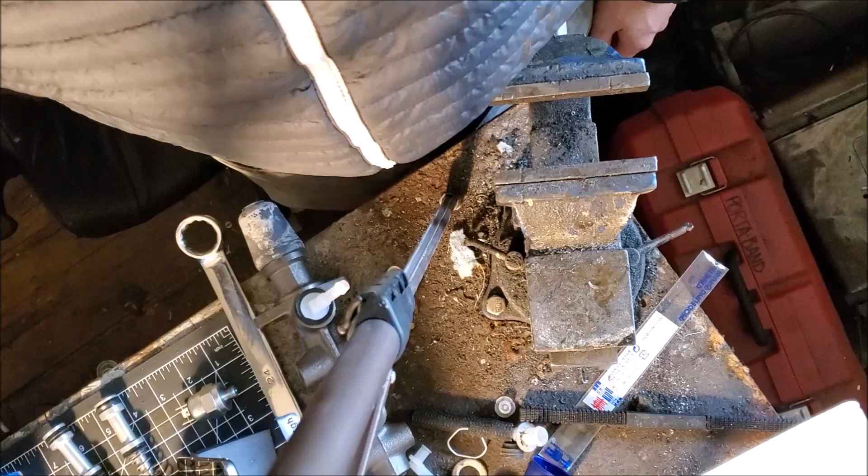Hello. This video is about master cylinders for the Type 3. I'm replacing mine because when I was getting an alignment done, the guy who was doing the alignment was saying, like, hey man, your master cylinder's leaking. It's just a little drip, drip, drip sort of situation. So you should probably look into replacing that.

And to be honest with you, this is the last part of the whole brake system of the car that I haven't replaced. I mean, I've rebuilt the calipers and done all the pads. Not new lines. Don't have to change the lines. The lines are fine so far. Brake cylinders, brake shoe rebuilds for the rear, all that jazz.

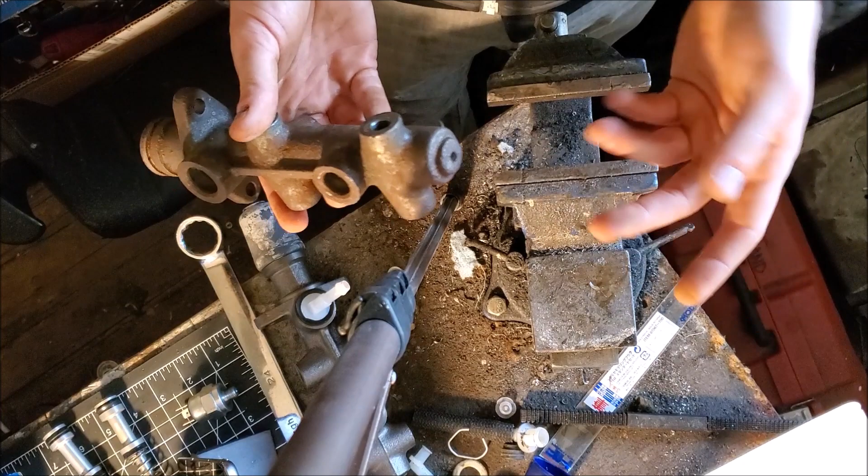This is the last bit that could possibly fail on the car. And it did fail because it's old. I mean, look at it. This is how they're supposed to look. Like, yeah, one's nicer than the other one. So I've been on a bit of an odyssey here, and in the process I've learned quite a bit, which I'm going to share with you guys in case you don't know them.

So basically, the Type 3 masters are essentially the same across years. I think the split is 69, where you had to have a specific line for it. So I think the 69 ones are specific. And the differences, other than the 69, are the internal bore sizes past that, and the internal bore sizes previous to that. And they're all denoted by, like, there's 19, I think there's 18 and 17. Basically, if you take it off the car and it has 19 on it, make sure that the one that you replace is 19 as well.

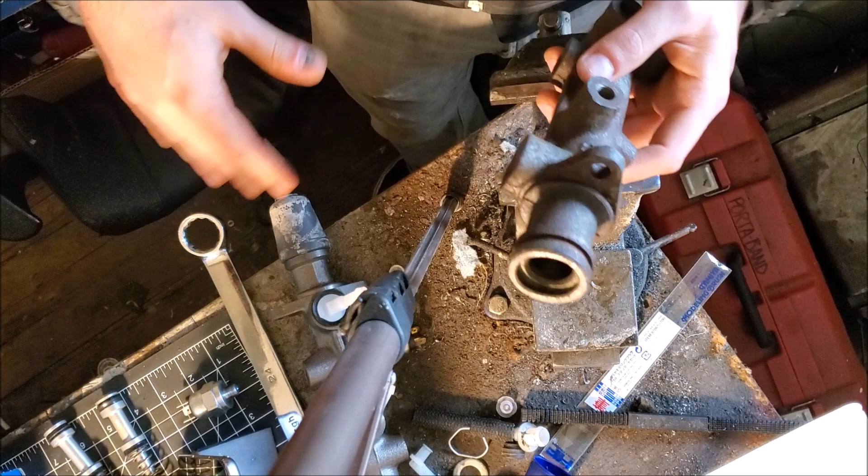But yeah, this one is replaced because I noticed that there's a hairline crack right here, and I actually noticed that today. I was just gonna rebuild the internals, get new everything on it, new rubbers, new brake lines, all that stuff, and then just throw it back on the car. But then I noticed this little hairline crack, and that is definitely good enough to cause a leak. And it's gonna grow over time, and it's best to just replace the damn thing.

These things are not cheap. If you go German, which you should because it's a part of your brake system, and that's not a system that you want to be cheaping out on, ATE, I believe, is the manufacturer. They're like $150 a pop. And I was stupid, and I actually ruined one. This is the first one I got, and I ruined it because of what I'm going to go over later with the brake light switches. I definitely learned my lesson there, so I'm going to share that with you guys.

But let's talk about rebuilding and what it actually all looks like underneath there, if you are going to rebuild it. Rebuilding is always the cheapest way to go, obviously, because a rebuild kit is like $20 versus like 160-ish for a full one of these. So if your actual housing is still in good shape, you should probably rebuild it. It's really not that complicated. If you've ever rebuilt a brake master cylinder on a motorcycle, it's the same thing pretty much.

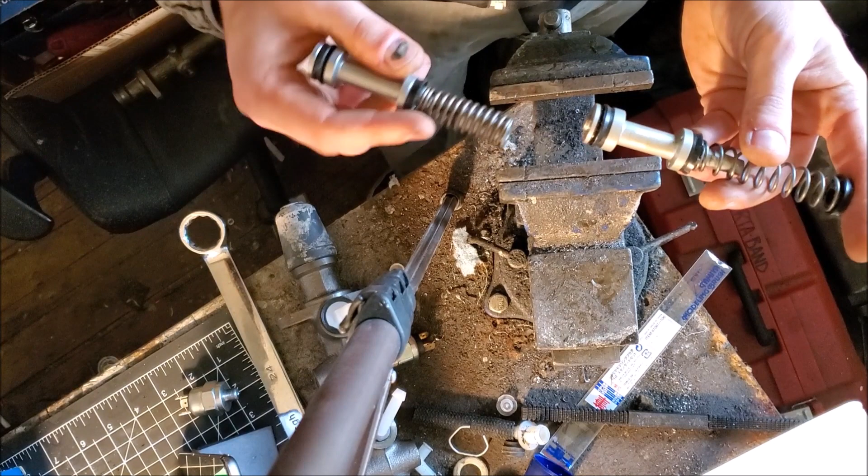Let me just show you how it all sort of looks, the internal pistons and whatnot. So from the mouth, it basically looks like this. This is the back of it, this is the front, the mouth of it that goes into the car, into your brake pedal. So back, front, and this is pretty much how it all fits together. There's two pieces, this pusher and this pusher here. And it's important to look at it to see a few things.

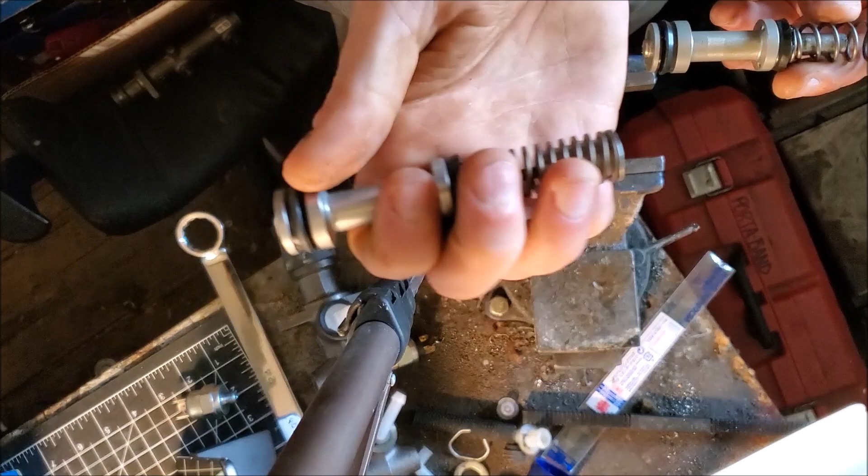All of these gaskets are flared, and you've got to make sure they're all flared in the right direction. You don't want to have it like this or like that, because then it just won't push anything. But it's really easy. Just slide this part in, and then slide this part in, and that's pretty much it. It'll seal itself in.

One part that is a little hard if you're rebuilding is this little cap that goes on the back of your spring here. If you disassemble it, I haven't found a better way than just getting the master cylinder and pounding it, because the front part here will come out no problem. When you take this off and take the circlip out, it'll basically just spring out, and you just grab it and pull it out, no problem.

But this one sits down in here and doesn't want to move. So what you have to do, and hopefully if it's a worn out one it won't take too much effort, is take the mouth against a piece of wood, something soft, and just pound it until it slides itself out. And that's pretty much it as far as a rebuild goes.

But a lot of times this little bit at the bottom here is left behind, and if it's left behind you really can't get at it, because it's not sealed on here any certain way. It just lays on top there. So when you're pounding this out, this thing's not going to come with it, so it's probably still down in there. If you're rebuilding it and this doesn't come with it, just take it off and push it in there, hoping that the last person that rebuilt it put this thing in there.

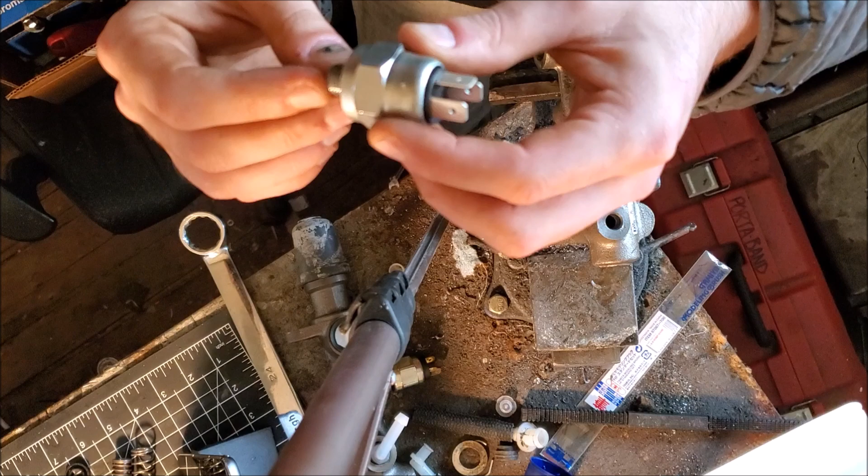These brake light switches are interesting things, because usually brake light switches on modern cars are electronically controlled. This is hydraulically controlled. There's a little pusher in here, so when you push on the brake and send the brake fluid out everywhere in the system to clamp everything down, it pushes a little ball, I think it's a ball bearing, forward and activates the switch here, which tells the brake lights to light up.

So there's a little thing here, fluid goes through there. It's another part of this whole equation where potentially you can have a leak. So it's important to be good about these sort of things. What do I mean by that? Just make sure that's done right.

These are German brake light switches. They're unfortunately about 15 to 20 bucks a pop, and you need two of them. But if you have to replace these things, you have to re-bleed your entire system. So if you have your master cylinder off, it behooves you to spend the extra money. Instead of the 10 bucks at AutoZone, spend the 20 bucks from an actual supplier and get the right stuff so you don't have to touch this for another 60 to 100,000 miles.

If anyone's actually driving their Squareback that much anymore. But I think it's the same idea for the Beetle too.

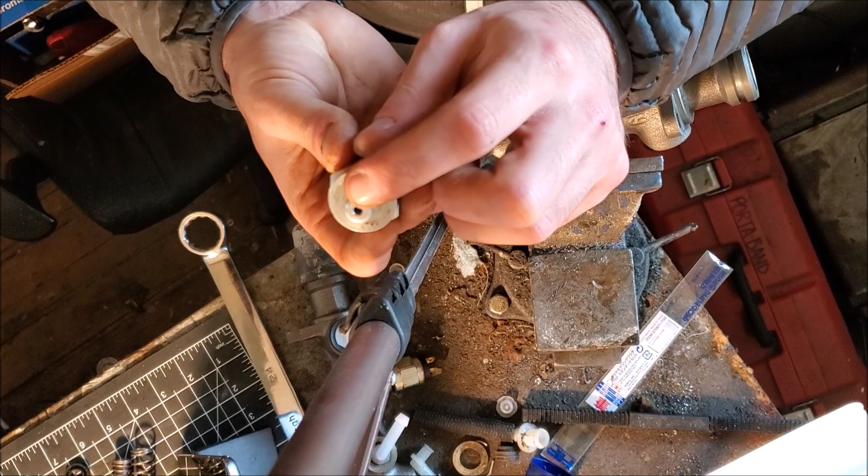So what that means is that you cannot crank this down, otherwise you are going to just shear this entire thing off, and you're going to have basically this stuck in here. And ask me how I know, because I did that. And that's the reason why I had to replace this master,

because one other thing that I messed up with, and this is something that I knew I should have done, but I was rushing, and now it cost me money. I had an extraction tool in there, and I was trying to get it out. So you drill in here and then pound the extraction tool in there and try and torque it off. It was working, but I didn't set my depth well enough. What I should have done is taken my drill bit.

Oh shit, watch it guys.

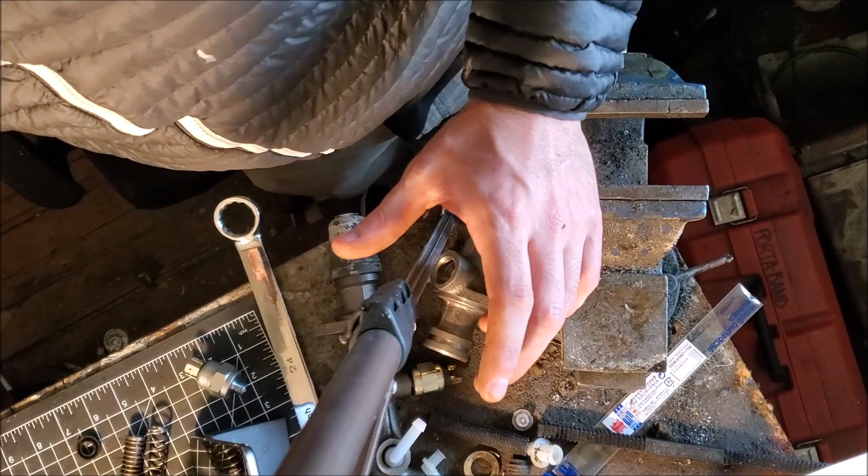Took my drill bit and, as an example, checked the depth on this one, and basically put a piece of tape right there and been like, okay, that's bottom depth, don't go beyond that. And I knew I should have done that, but I didn't because I was rushing, and I was upset that it got sheared off in the first place. So instead of backing off and doing something else, I was like, ugh, screw this, and just kept going. It was stupid.

So I drilled through that into the actual bore here, and I don't know if I ruined it, but definitely it's not perfect anymore. So I decided I had to go and get another one. So learn from my mistake, please, because this stuff's expensive. And I had to pay for my mistake. Hopefully you won't have to.

So, one more quick thing to go over before I show you the right way to put these brake light switches in. Come on, buddy. Damn, these things are on there. Okay, so the brake lines, this hose bit right here. When I took this off, initially what I thought was causing the leak was these hoses that connect the hard lines to the master cylinder, there's a little bit of hose here.

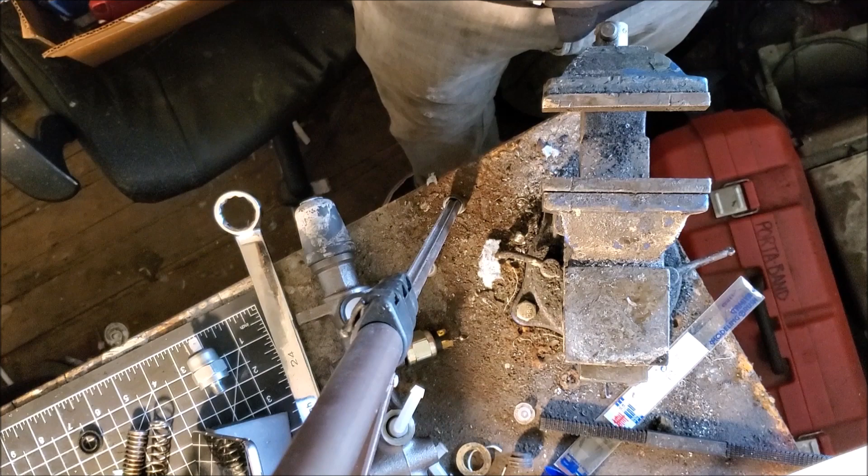And this stuff is really tight because now I can't fucking get it off. So good thing I got a couple feet of this stuff, because I think I might have to just throw this out because I can't get it off again. So yeah, this is the stuff. That's what you want. It's not that expensive. It's just, you know, you have to wait for it. So I would replace that stuff if you notice that the stuff on there is not the actual right line, and it's like fuel line or something.

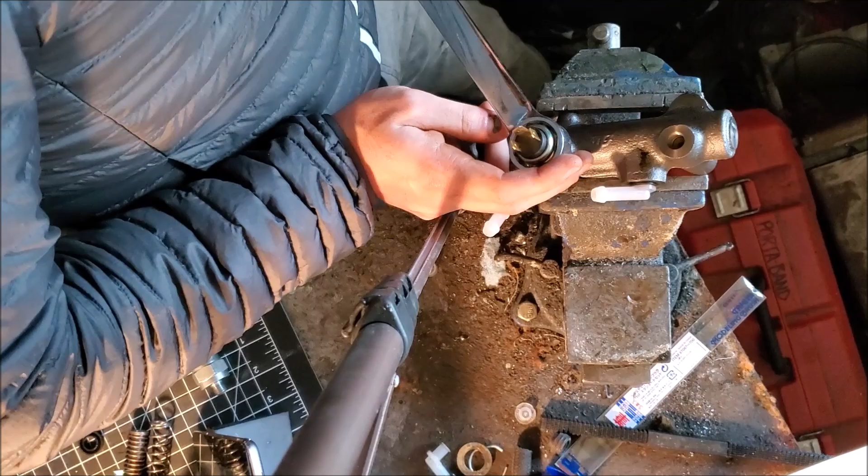So anyways, let's talk brake switches. So when you're putting these things on, and by the way, this is a 24 if anyone cares, you'll notice that it gets to a point and then it's just really tough to get these guys going down. And again, because of the makeup of these things, you don't really want to force them. So the best thing to do is what I'm doing right here. Let's just back it off, tighten it. Whoa, shit. Ow. Just do that little dance for a while, and eventually it'll close itself up.

Maybe it would be easier if, like, put a little brake fluid in there or something. I don't know. I don't think it would be that much easier, but the fact of the matter is that you get to around here and then it stops going, and you have to be careful with this stuff again because it's not very strong. So I'm gonna do that back and forth, back and forth, and get these brake switches on here, and then I'll go under the car, put it on there, and hopefully show you how to reset your brake pedal and all that stuff.

Another thing to keep in mind is when you have this boot on here, there's a hole. The hole goes on the bottom, not the top. It goes on the bottom. Pro tip. But anyways, that's enough bench work. Start actually putting this on the car.

And by the way, being that the Squareback is pretty much done, my next project, I'm going to actually start working on my Subaru again. So videos of that to come, and then immense amounts of hate because the Subaru community is pretty bro-y and they all know absolutely everything. So looking forward to dealing with those guys. You Volkswagen people are just the fucking best people on earth. I love you guys. But yeah, looking forward to that one for sure.

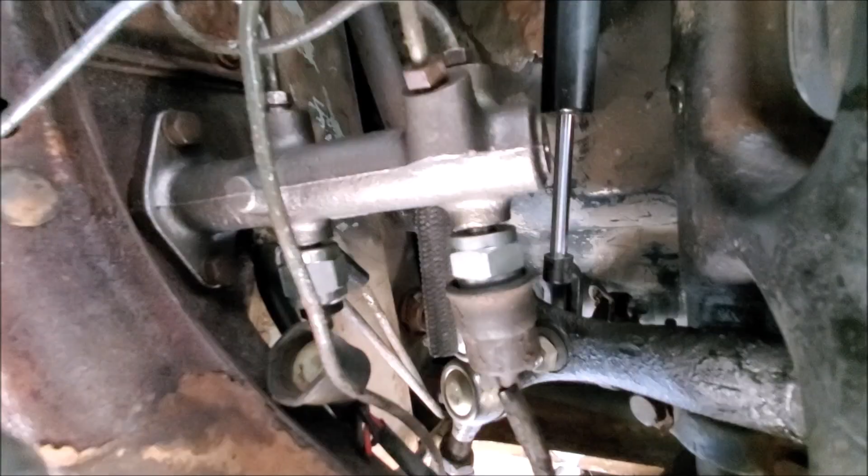And we're under the car, and the master cylinder is pretty much installed. I'll tell you what, man, this wide angle lens, super cool for getting underneath here. So anyways, 13, 13, 11, 11, 11. This is the part of the job that sucks because you have like no room to do anything in here. Everything's just crescent wrenches, and you're here for a while, and your wrists and your forearms end up hurting. But you end up daydreaming about that next purchase, the next thing you're gonna do. You just sit back, relax, and you're gonna be under here for a while.

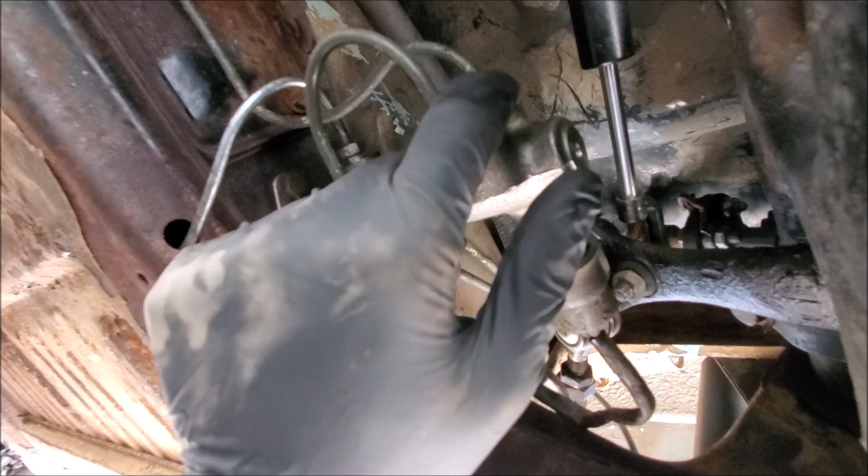So yeah, everything just gets snugged up. Don't go crazy because it's little threads that we're dealing with here, and you don't want to round these off. Snug it up. Same with these. Snug them up. Put your guys on there. Connect your hoses to the brake lines, and that's it. And then from here you bleed and hope that nothing leaks out while you're doing that. And the bleeding procedure is furthest away to closest to the master cylinder. So you're going to start with the passenger side rear wheel, driver side rear wheel, passenger front, driver front, and that's your bleeding. You know how to bleed. Get it done. This is the job.

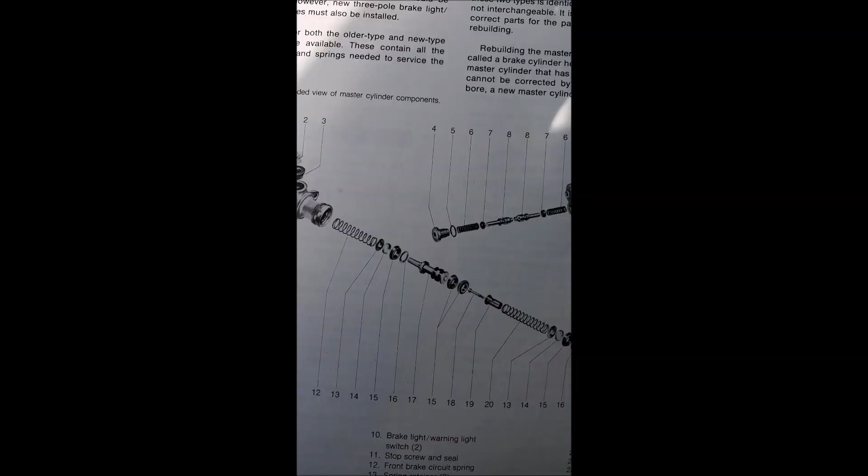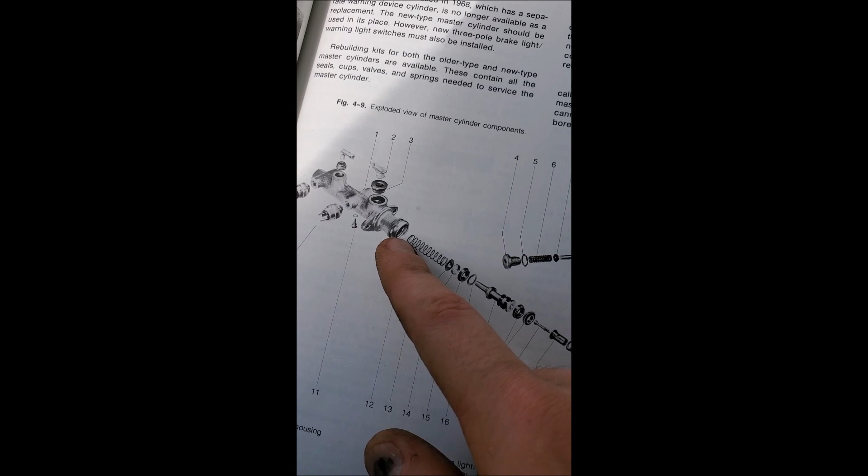Enjoy your life. Okay, I messed something up. I'm looking at the exploded diagram of the master cylinder. There's nothing that goes below that spring. That little stopper I was talking about that I thought went on the bottom actually goes right there. Or actually, no, it's right there.

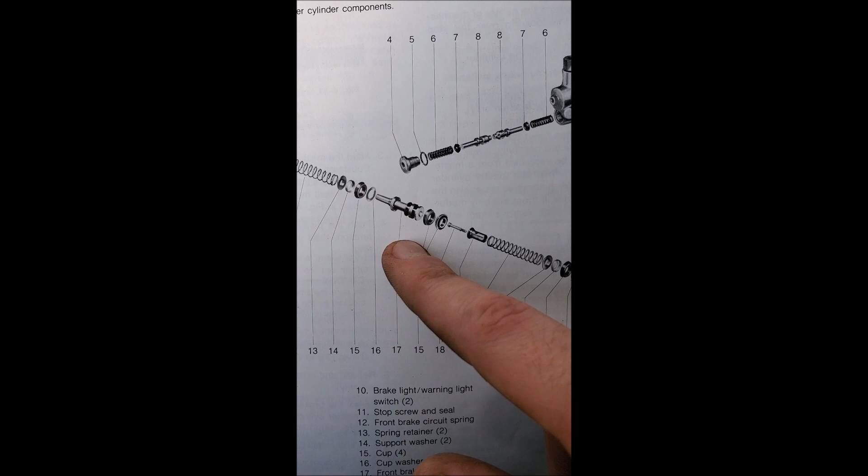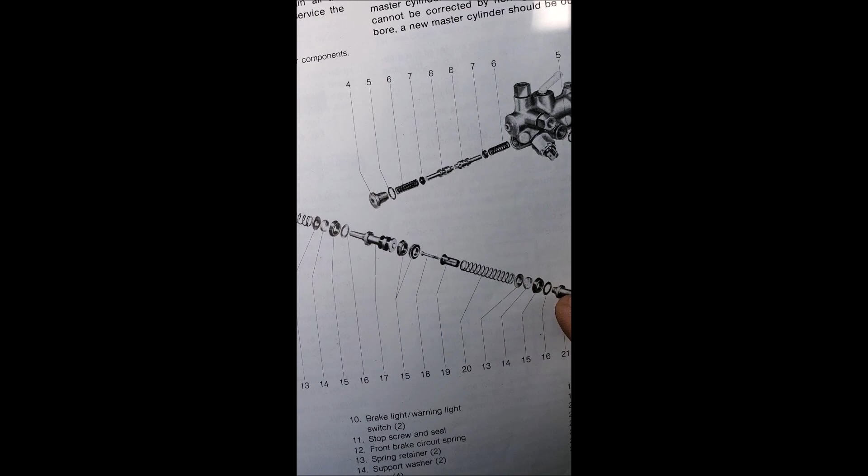So yeah, it goes in between the two here. Nothing goes back there. But yeah, this is why a shop manual is such a good idea. Anyways, next thing we gotta do, push rod adjustment.

This has turned into one of those jobs, man. You know what I was talking about not doing? Over tightening this. And look what I did. Sheared it right off. So now you guys get to see, well, one of my favorite videos to watch on YouTube is videos of guys doing bolt extractions. But the thing is that they're fun to watch, not fun to do. But this time I'm not going to screw it up. I'm going to get this right.

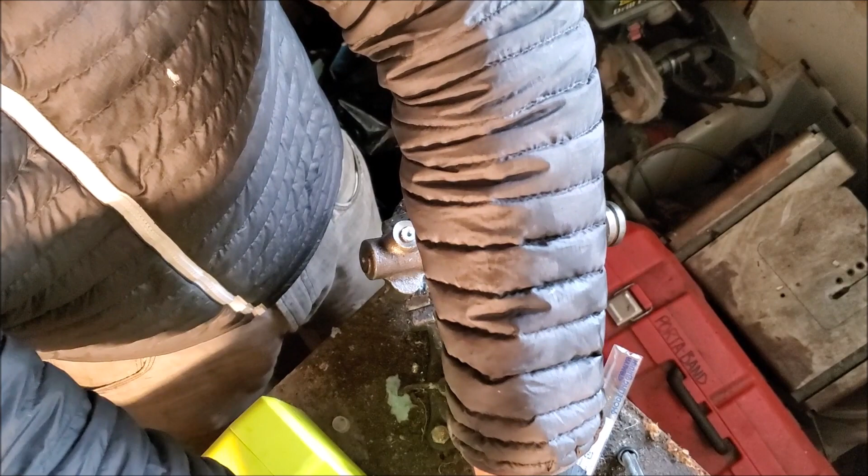So, what am I going to use? Well, some, what do you call those things that you use to drill things out? Drill bits. And then these to get it out. So first thing I gotta do is drill this, but I need to remember how I was saying about that depth gauge. I gotta make sure that I don't do that.

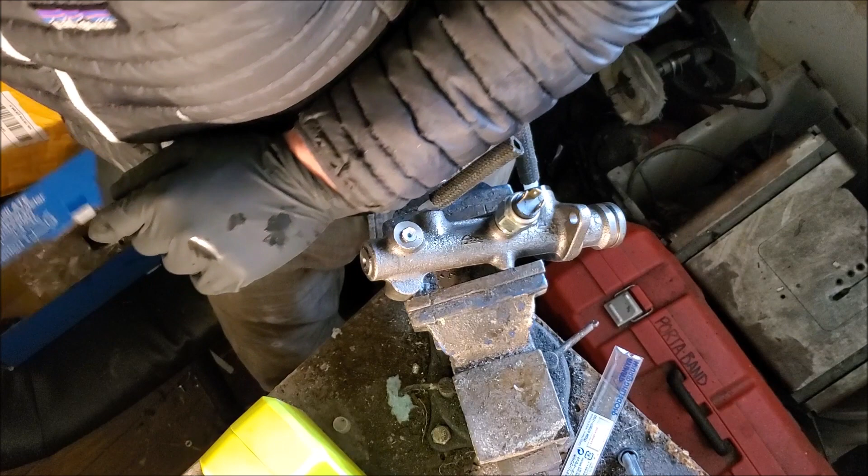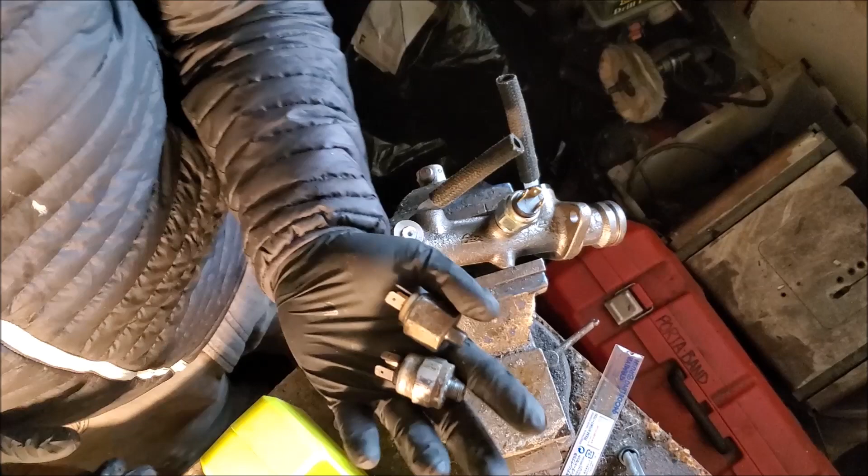So I think I have some older brake switches lying around. I think I'm gonna use that to measure. So give me a second. I gotta find them. Found them. These guys. These are actually the original ones that came off the car. But they're not OE. This one might be.

This one isn't. The weird thing is I was thinking, because this one was leaking but this one wasn't, oh well, it's probably because I didn't screw it in all the way. I just screwed it till it was really, really tight. This one didn't leak. This one did. So I'm wondering if the threads in here didn't just strip. I'm hoping that's not the case, because then I have to clean out those threads in there. And I really don't want to do that.

Anyways, let's find a good drill bit to use. Because if I'm using those extractors, I want to use the biggest extractor I can, so I think I'll start there. What is this? A 5/16? Okay. Whatever that is. And there's already a pilot hole for me. Isn't that nice? Alright. Some tape.

Set my depth correctly. God damn it. Fine, I won't use gloves. What am I doing? There we go. So it's about down to there. And a little less. This should be enough. That right there. Let's do that again.

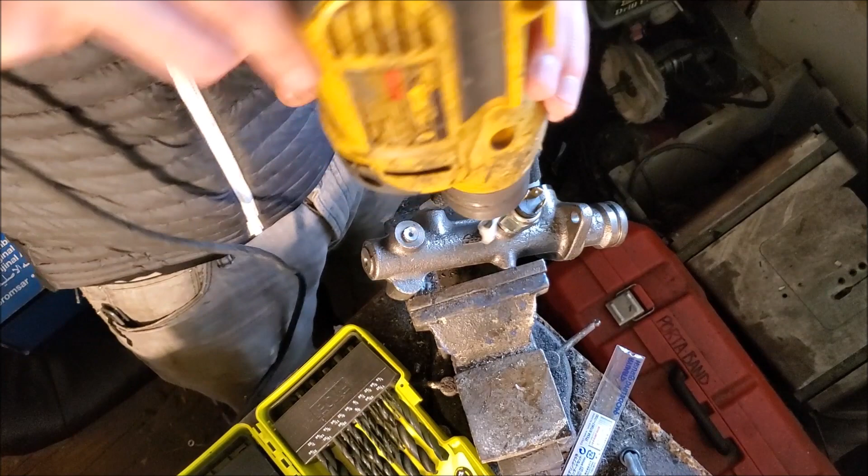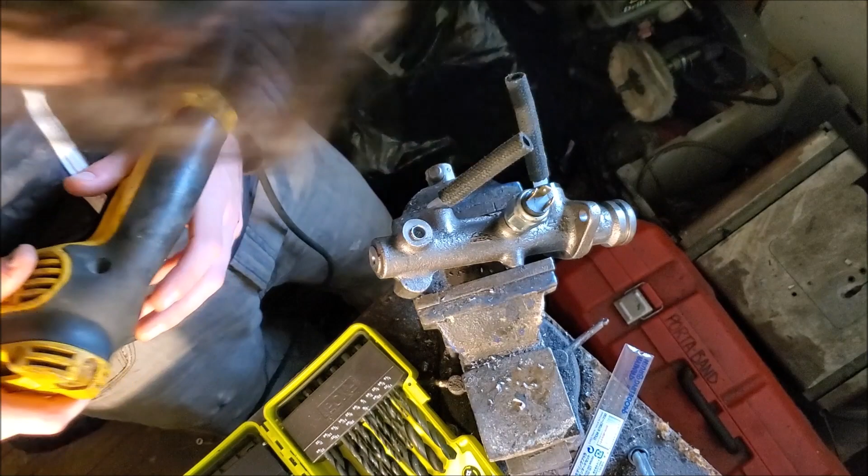There we go. There's my depth gauge. That should be enough. Alright, wish me luck. Okay. All right. Am I gonna get lucky today? Am I really taking this one? Big old boy right here? Yep.

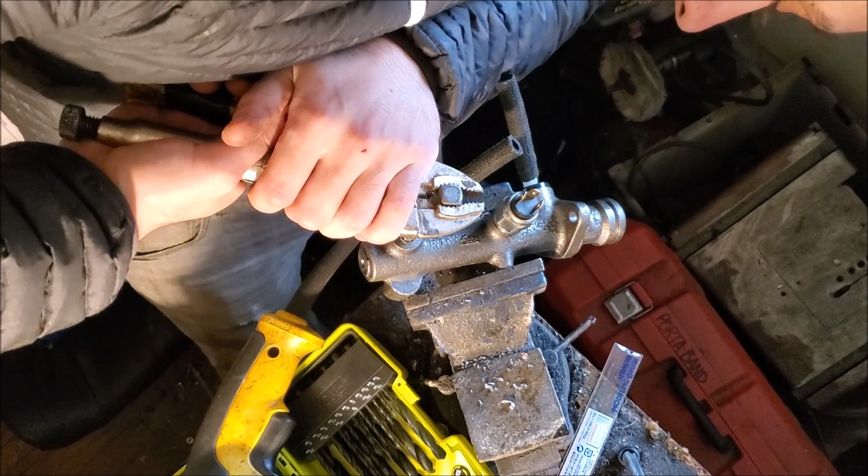Am I going to... Oh, wait. Do I have a vice grip? Yeah, I do. Of course I do. Is it going to be... Nope. Okay. Moment of truth. Oh, good. It's going. Cool. Would you look at that? Old Mike knows how to do a thing or two sometimes.

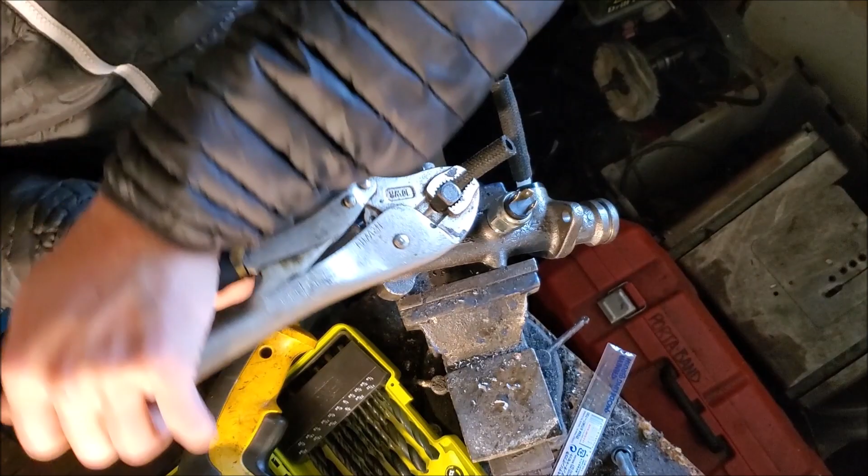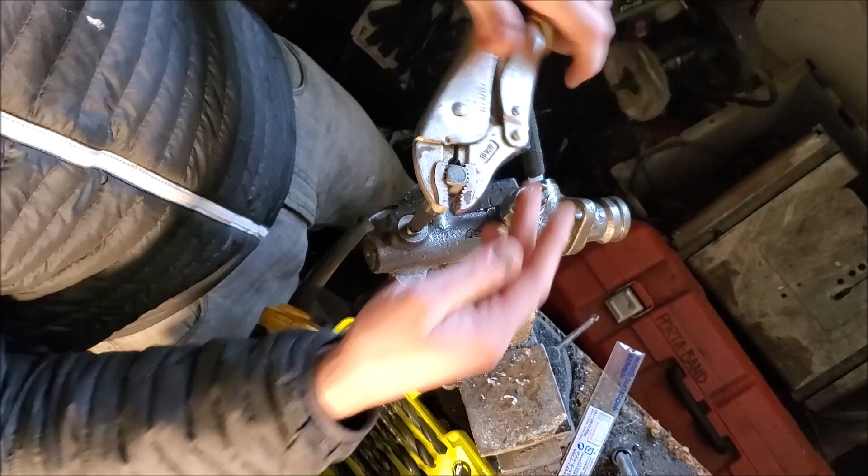Alright, now I get to see what condition the threads are in, because I have a sneaking suspicion that I'm going to have to rechase all these threads. Did my depth gauge work? Oh yeah, it did. Look at that. Old Mike's got it right this time. Okay. Let's take a look at this. The threads look good on the inside. And the threads look good on here.

So I don't understand why the hell, and this has happened only on the OE ones, these freaking threads just don't thread nicely. Like, they just stop. I should be able to finger tight that better, but I don't know what it is. It's the same pitch and thread and all that jazz, but I don't know. It's weird.

Anyways, both of these brake light switches were working when I took them off the car. So I might as well just reuse one of them. Frankly, I don't want to go to the goddamn auto parts. I don't want to fucking order another one of these stupid things. And it worked before, so why not? There's my depth gauge. You can tell I ran into this exact problem before, because I just blew through that no problem.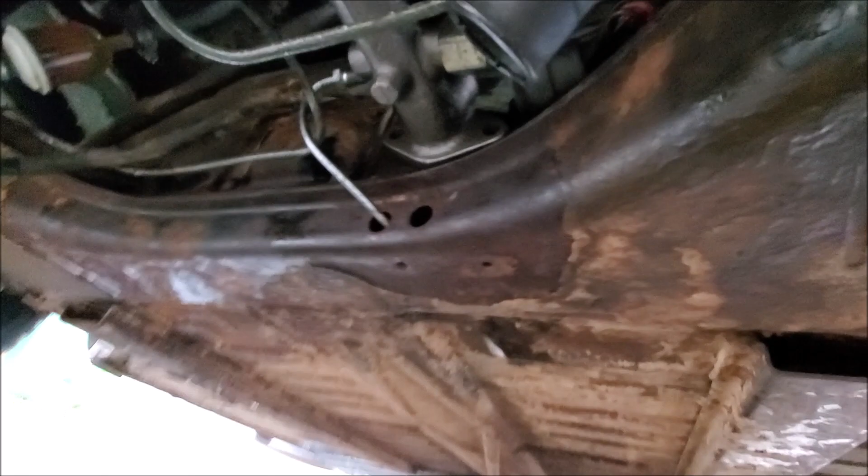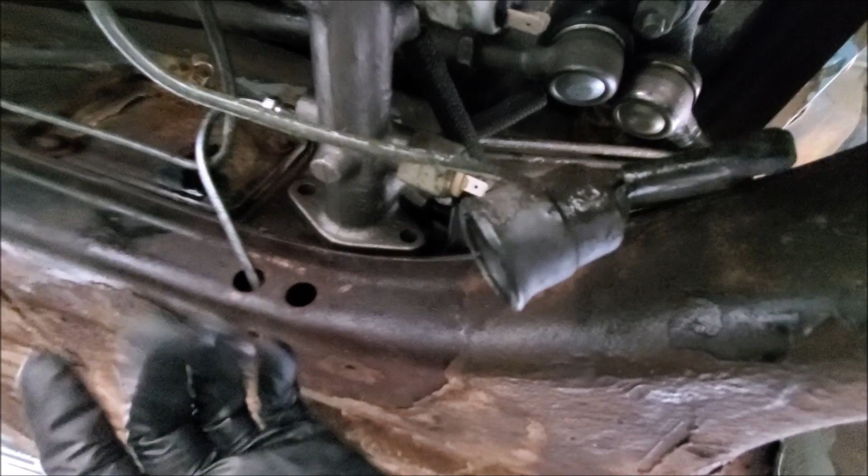This stuff isn't. Anyways, when you're reinstalling the master cylinder, there's a push rod that connects from the brake pedal assembly to this. And it's a little hole that you've got to get the push rod into, otherwise your brakes aren't going to work. So there's a little porthole here that I stick a screwdriver in

to help the push rod go into the master cylinder properly, and you can see it if you shine a light from your pedal assembly. You can see what's going on in this little porthole here, and you can line it up a lot easier. Just get a screwdriver in there and try and move the push rod around a little bit to get it in here.

It's a little finagly, but eventually it goes. But that's extremely important. So I'm gonna bolt all this stuff up again for the third time and try and end it for the day.

All right, guys, I wanted to tie a bow on the end of this job real quick and talk about the push rod adjustment. There's really not a lot to it. Once you get back in there, you'll see there's a little bolt that you need to loosen, and it'll allow the brake to go back and forth and you adjust. But I wouldn't do that until you have bled your brakes a couple times, because this car takes a couple attempts to get the brakes bled correctly.

Being that you're doing essentially an entire brake fluid flush, you have to bleed the entire system. Now, what helped was a power bleeder just to get brake fluid to come through the four wheels of the car. But after that, I always trust traditional bleeding methods to get it working right. So someone in the driver's seat pumping away, and then you cracking the nipple and all that stuff. You guys know how to bleed brakes.

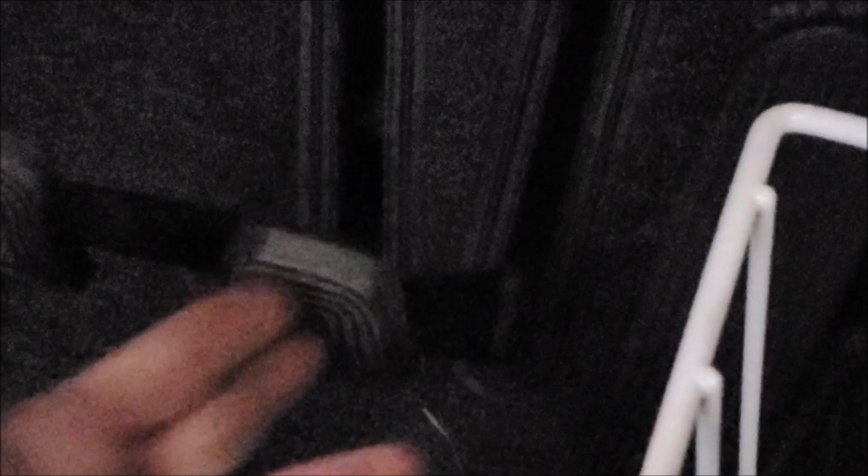But only after I was getting proper stiffness in the brake pedal, then I went in and thought, do I need to adjust the brake pedal at all for the travel? And for me, no. It starts catching right about there. That's when the brake starts. And if you look in the manual, that's about the amount of travel that you want. So just guesstimating it, that's around where it needs to be as far as travel goes. That's when the brake starts operating.

Don't give up on bleeding. It took me two separate attempts, because I bled it once, got it out on the road, and I wasn't happy with it. And I bled it again, got some more bubbles out, and now I'm fairly happy with it. And I bet if I bleed it a third time, I'll find more bubbles in the system, and probably a fourth time I'll get it even better. But that's just how it is. I'm happy with how it drives right now.

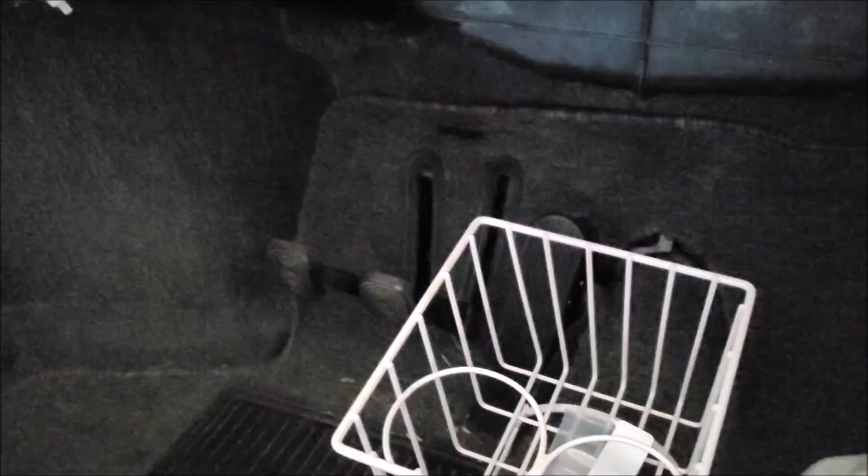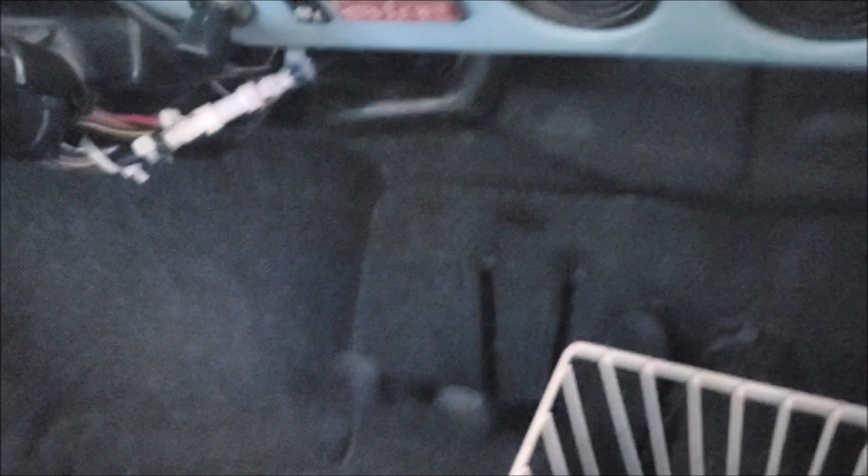That's pretty much it. I don't know why I was so zoomed in. This is perfectly fine. But yeah, travel is like that. That's free play. And then the brake starts functioning properly. That's it. I think all that's left for me to do now is eventually make a video of everything the car's done. I drive it to work now. It's pretty good. Anywho, that'll wrap up the brake video.